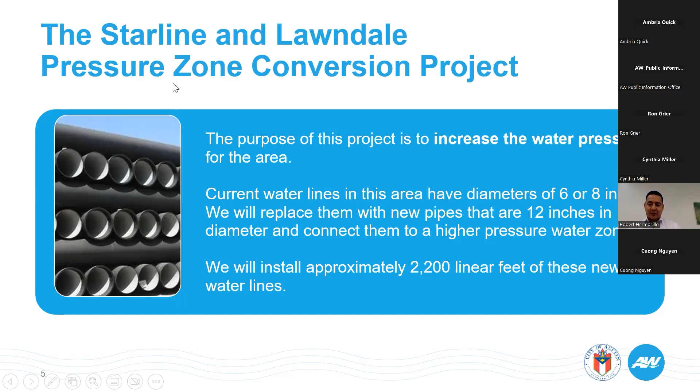All right. Well, Austin Water, as you know, has developed the Starline and Lawndale Drive Pressure Zone Conversion Project to bring higher water pressure to your neighborhood, as Cynthia mentioned, and we are almost ready to get underway. The purpose of this project is to increase the water pressure for the area. Current water lines in this area have diameters of 6 or 8 inches. So we will replace them with new pipes that are 12 inches in diameter, and we will be connecting them to a higher pressure water zone. On this project, we will be installing approximately 2,200 linear feet of these new water lines. Next slide, please.

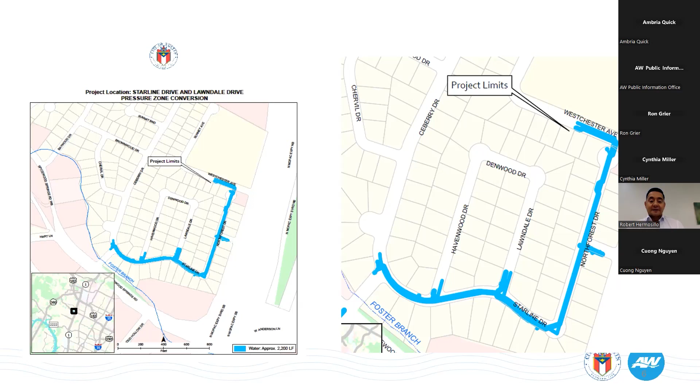Here, you can see a project location map, and it's showing our project limits. If you notice, this blue line on the map shows where the new lines will be replaced: Starline Drive, Lawndale Drive, Westchester Avenue, North Forest Drive, Havenwood Drive, and Ceberry Drive. Slide, please.

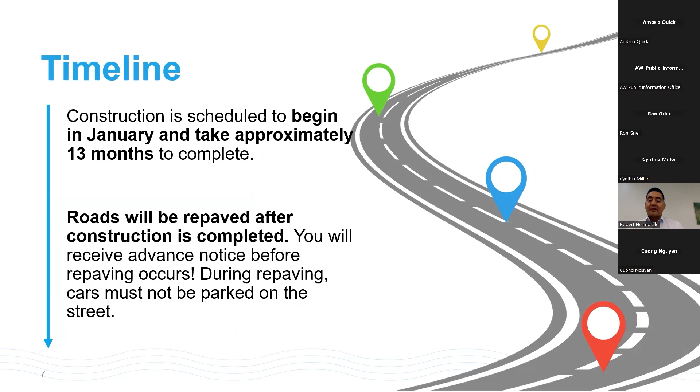Timeline. Construction for the project is scheduled to begin this January, and it will take approximately 13 months to complete. We will be working in the city right of way, and once installation of the water mains and service is completed, all disturbed roads will be repaved, and you will receive advance notice before repaving occurs. Next slide, please.

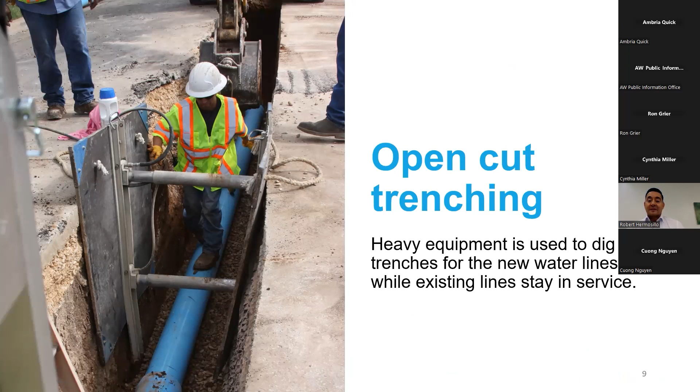Okay, next, what to expect during construction. Next slide, please. So during construction, expect open cut trenching, where heavy equipment will be used to dig trenches for the new water lines, while existing lines will be staying in service. Next slide, please. Additionally, there will be several stages to the project.

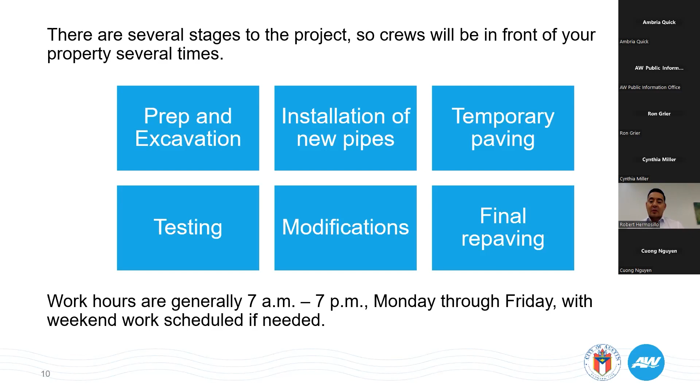Work hours are generally 7 a.m. to 7 p.m., Monday through Friday, with weekend work scheduled if needed. Next slide, please.

Right of way. Most work will take place in the public right of way, and in many cases, the right of way is located approximately 10 to 15 feet behind the curb, in an area that you may consider part of your lawn. So it may be necessary to remove landscaping or other personal items before your residence can be connected to the new water lines.

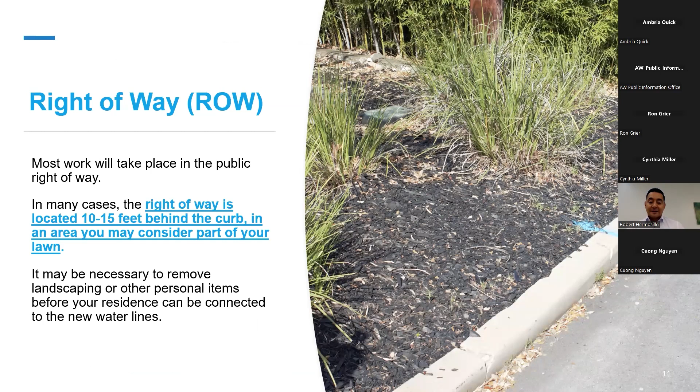Next slide, please. Tree trimming. Also, as part of the right-of-way slide, and regarding tree trimming, please note that the contractor may need to do some tree trimming over the right-of-way. And should there be any need for tree trimming to facilitate construction, we will always make trimming decisions in consultation with a professional arborist.

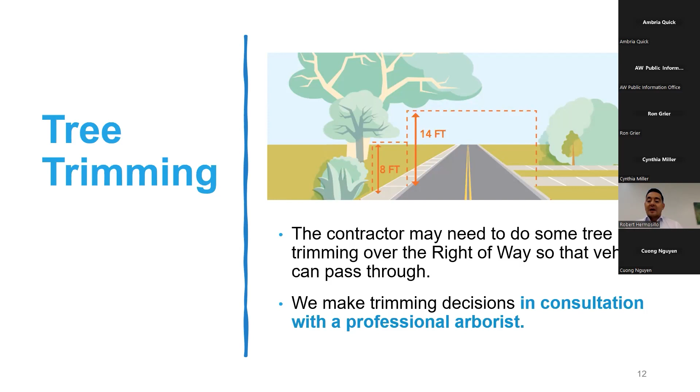Next slide, please. Traffic. When it comes to traffic, we will be closing traffic lanes for the project, but not closing entire streets. And so you will always have access to your home. For brief periods, access to your driveway may be limited, but crews will always be making sure that people can get in and out of their driveways.

Regarding utility service interruptions, at some point, your water service will be temporarily interrupted to connect your residence to the new line, but most likely it will be for a few hours on a single day. If there will be any planned water shutoffs, we will notify you 48 hours prior to service being interrupted by placing door tags and/or flyers on your front door. And it typically only takes a few hours for connections to be completed and service restored. Next slide, please.

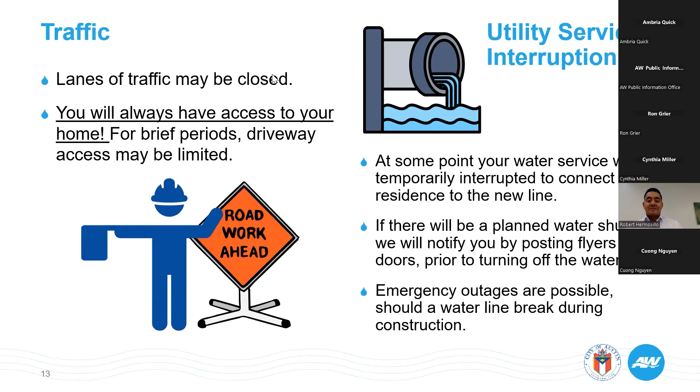Pressure reducing valves and expansion tanks. So after the new water lines are installed, there will be about 25 homes in the area which will need pressure reducing valves on their service lines and thermal expansion storage tanks on their water heaters. The pressure reducing valves and expansion tanks will be helping regulate pressure to protect your private plumbing. And so Austin Water will be installing both of those tools.

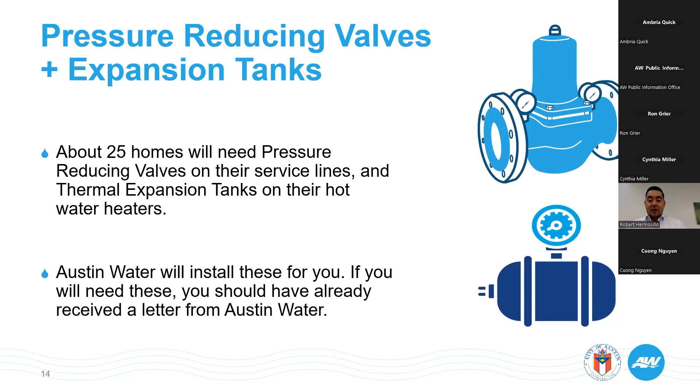That being said, if your residence will be needing these tools, you should have already received an acceptance of installation and a right of entry letter from Austin Water. And this is for acceptance. The city's offered to install the pressure reducing valve on your water service line and the thermal expansion tank near your water heater. So if you've received that, please review it, complete it, and sign and return it to us at the provided address on the letter; that'd be very helpful. Next slide, please.

No questions yet, but if you click on the Q&A button at the bottom of your bar, you can type in a question. If you'd like to ask your question verbally, then feel free to raise your hand. That's under reactions on the toolbar. And if you raise your hand, then we'll be glad to unmute your mic and hear your question.

And I see we do have one Q&A popping up. So we've got two great questions. One of our neighbors says we mentioned 13 months of the project. Can we provide a more detailed schedule for the different addresses? That's a terrific question. Robert, I don't know if you want to kick us off with an answer. I know Ron, you'll be weighing in a lot with the schedule. So we'll look for an answer from you guys.